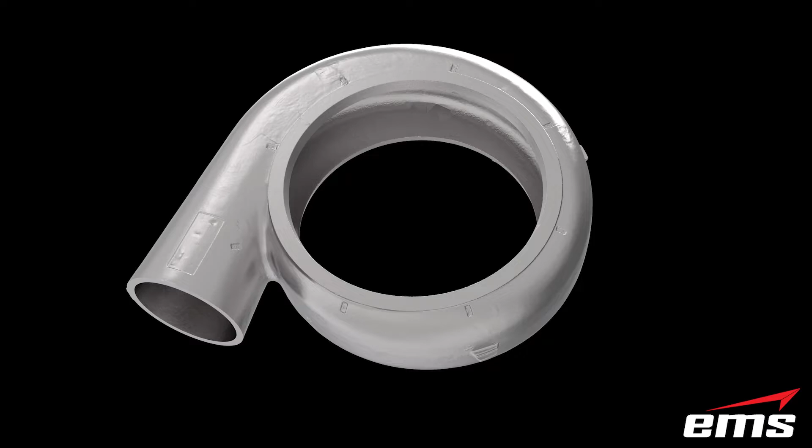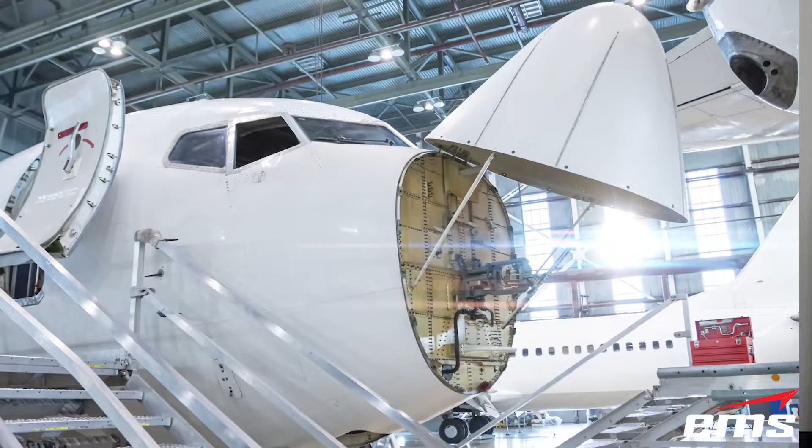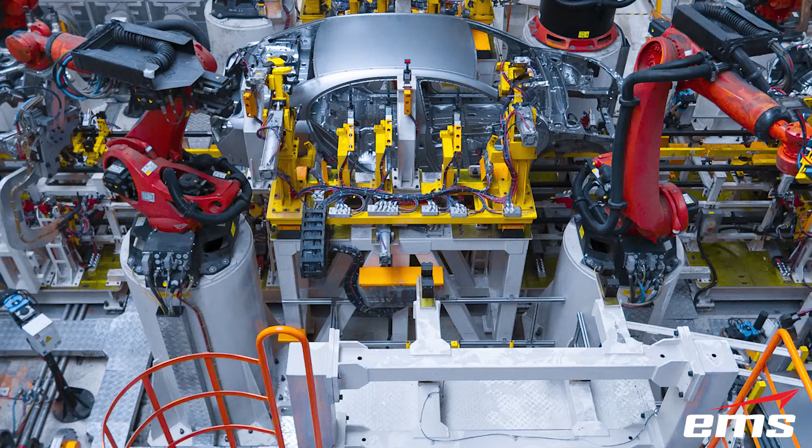Let's start by talking about who the new HandyScan Max is for. This is for people who want 3D scanning and metrology grade inspection for medium to large parts, and be able to do it on a shop floor quickly and easily with a system that is very portable. This includes large metal fabrication assemblies, large aerospace parts and assemblies, large tooling like vacuum forming molds and dies, and large layouts of equipment, machinery, plumbing, electrical—anything where you've got a big area that you need to scan, this is going to be a great scanner to take a look at.

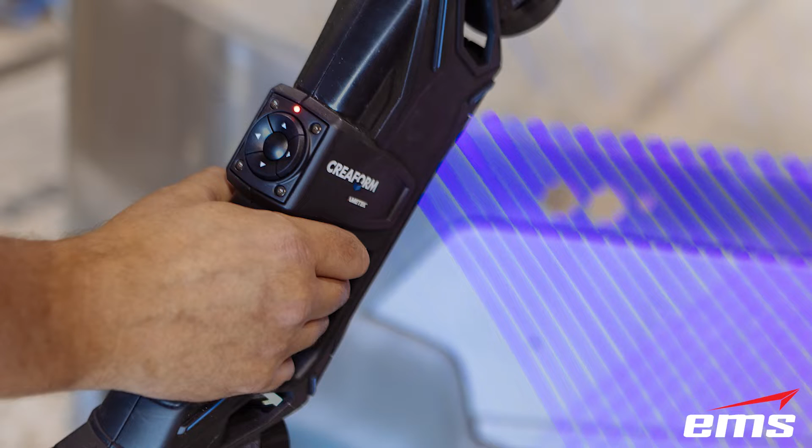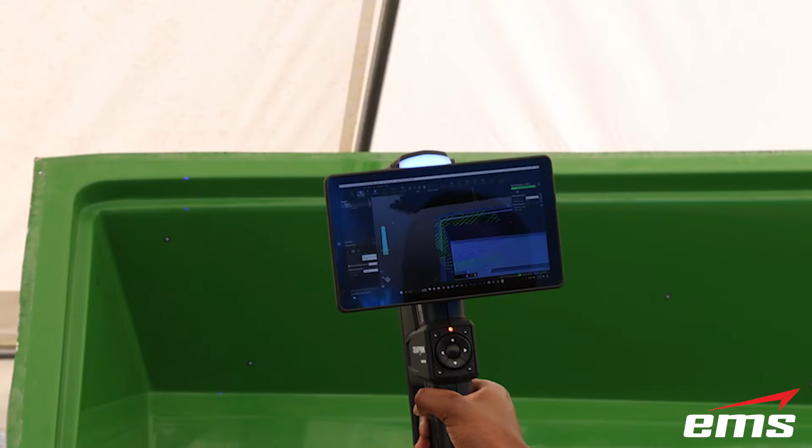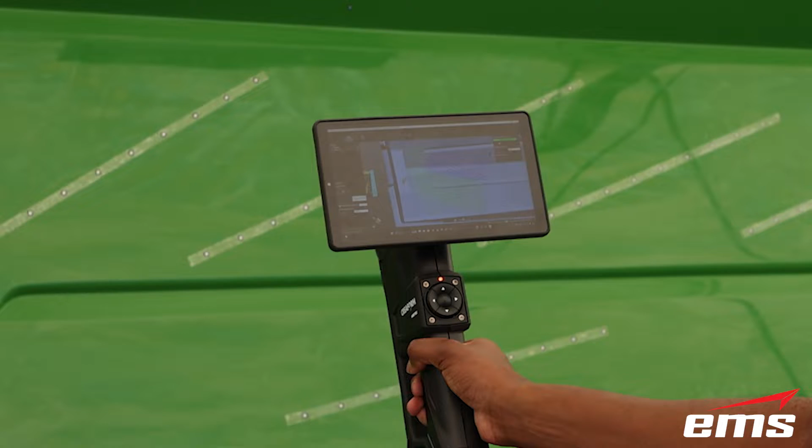You've got the smart panel on the back here, just like all the other Creaform scanners. You can control a lot of stuff. And then the other thing that's new on this scanner is we have a mount back here so that you can put a phone or a small tablet for remote viewing and control. What's nice about this is when you start scanning large parts, you have to be tethered to the computer, but this allows you to basically have that computer screen right here. You can control everything as if you're standing next to the computer—you can watch what you're scanning, stop, start, zoom in, all those kind of things right on the back of the scanner.

So that's really nice. And then finally, this has 3 different scanning volumes, and we're going to go into more detail on those and the differences between the standard model and the Elite model next.

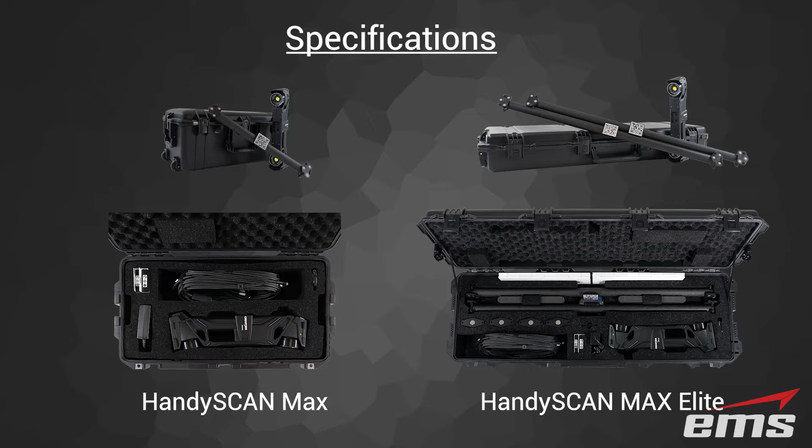Okay, first let's discuss the packaging of the two scanners. The HandyScan Max has a smaller single scale bar, so you can see it's in a slightly smaller case, where the HandyScan Max Elite has two longer scale bars, and you can see it's in a little bit larger of a case. But both of these cases we have checked as luggage and had no issues flying with these to go on site and do scanning projects.

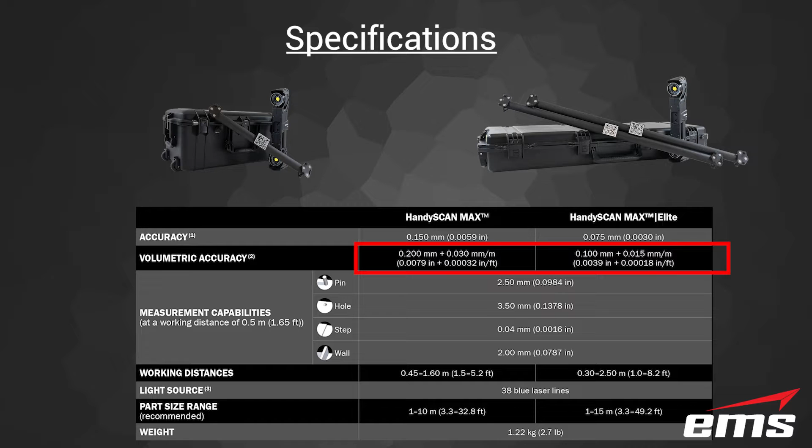So besides the accuracy difference, the other big difference between the two scanners is the scanning volumes, and we're going to go into much more detail on that now.

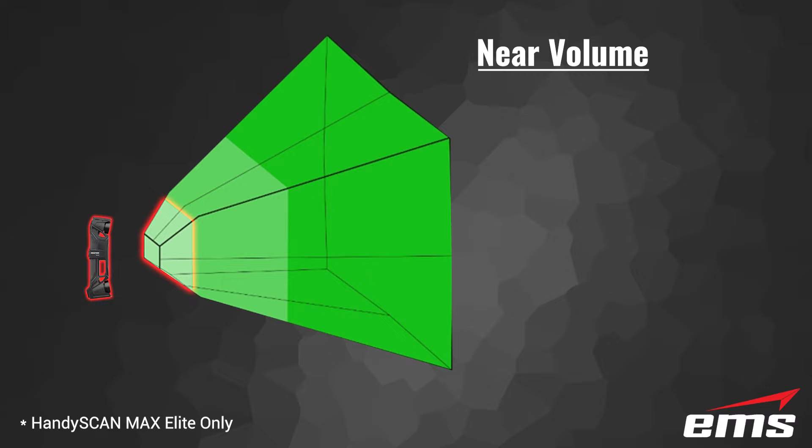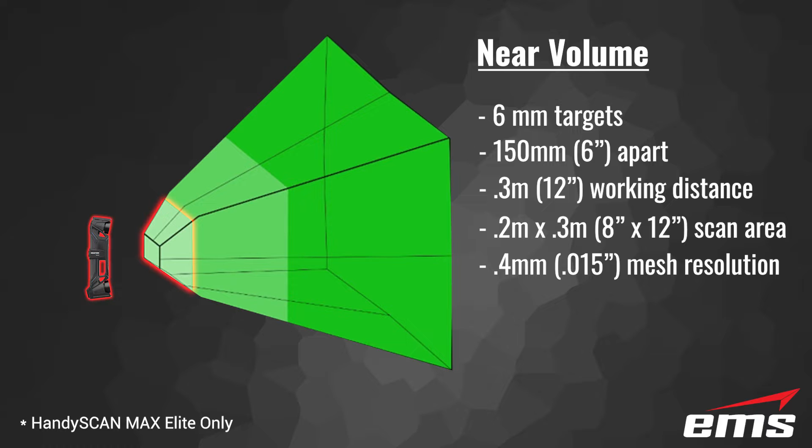Okay, so the first mode is what's called the near volume, and that is, as you see in the graphic here, that's your closest volume. That's the one if you're looking for the highest resolution. It uses the standard 6mm targets. You place them about 6 inches apart. It has about a 12-inch working distance or depth as you scan. And the scanning area, kind of your XY, is 8 inches by 12 inches. And you can go as tight as 0.4 millimeters or 15 thousandths of an inch, and that is your mesh resolution.

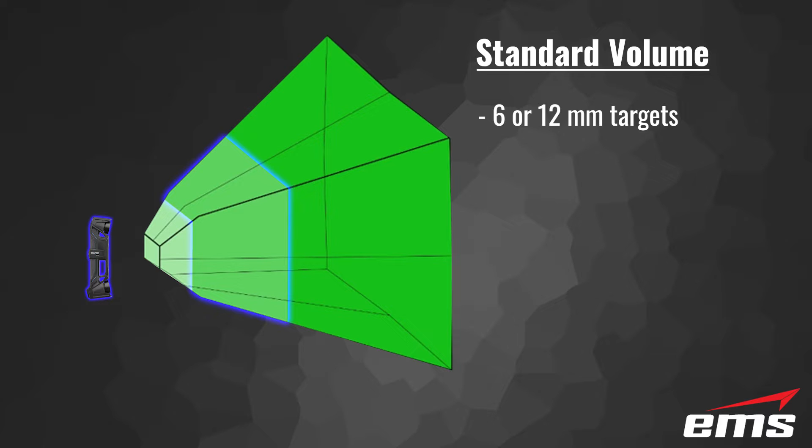So next up is the standard volume. This is available on both the standard Max and the Max Elite. Now, you can use either the 6mm targets or the 12mm targets. You can't use a mixture of both, but you can use one or the other. And the targets can be farther apart, at about every 12 inches. The working distance is 3.3 feet, and the scan area is about 3.3 by 3.3 feet. That's, again, your XY area. And the mesh resolution can go down to 0.8 millimeters, or 30 thousandths of an inch.

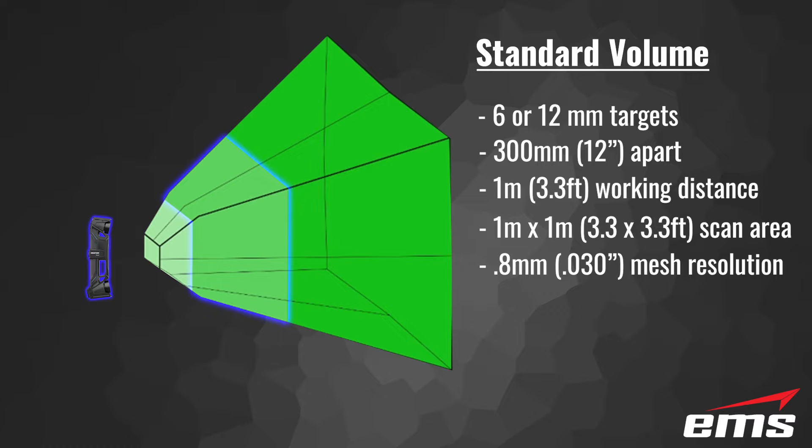And the final volume is the far volume. This is also only available on the HandyScan Max Elite. This uses only the 12mm targets. The spacing of those targets can be 20 inches apart. The working distance is 8.2 feet, and it scans an area of 6.6 by 7.9 feet. And the mesh resolution is 3 millimeters, or 0.12 inches.

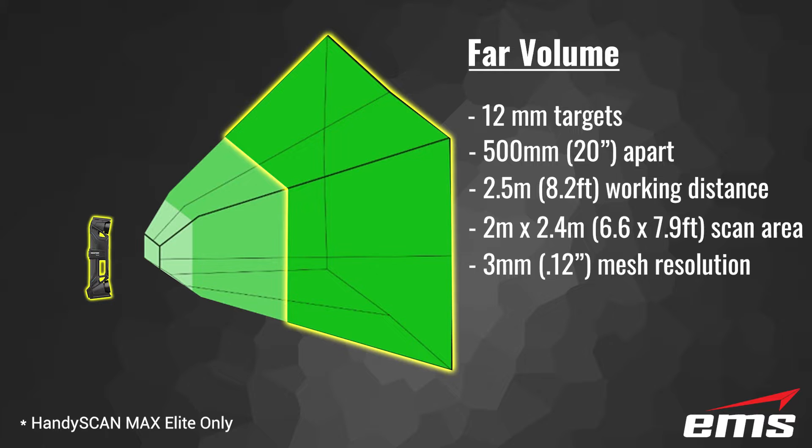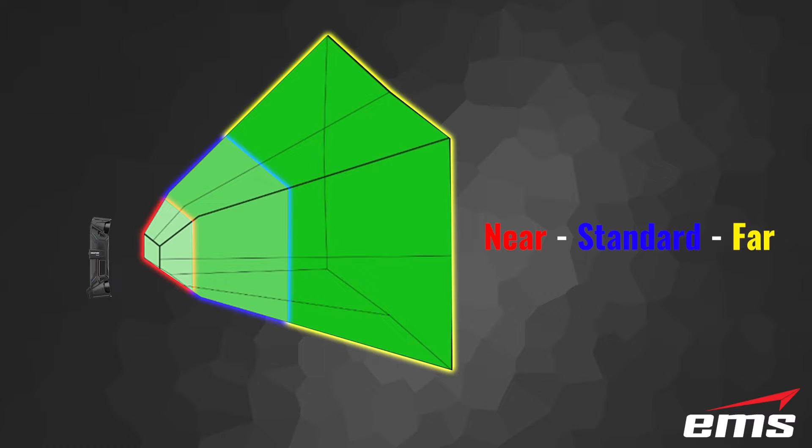So those are your three volumes available. All three are available on the HandyScan Max Elite, and the standard mode is available on the HandyScan Max. Now, part size will dictate a lot of this as far as which one you choose, but maybe which targets or which resolution you would like could also determine which mode that you pick.

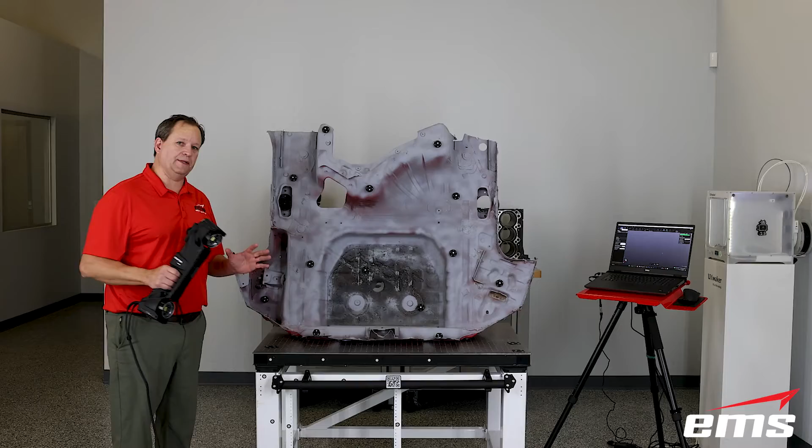Okay, so now we're ready to actually do some 3D scanning, and I thought we would start in the standard mode because I think that's the mode we found already that we use the most. But you may use only the very large mode or the short mode or all three. But let's start with the standard mode. So the standard mode uses the 6mm or the 12mm targets, as we talked about. And let me explain my setup here.

So I have these new spherical targets from Creaform. They come in a nice kit, and it's basically a little round sphere with 6mm targets, and then it's got a magnet on the bottom. Now, if your part isn't magnetic, we use that kind of thicker foam double sticky tape, and we just rip it or cut it to size, stick it on here, and then we can stick it on the part. This is a floor pan out of a car, so it's metal and obviously magnetic.

So you can see we don't have that many of the spherical targets on here, maybe 10 of them. Now, you can use just the standard sticky 6mm, 12mm targets in this mode. You can use a combination of the individual magnetic targets, those half spheres that we provide the CAD model for if you want to 3D print them—I'll put the link in the description below. You can use those, you can use our speed target tape, really any combination. Now you can't mix 6 and 12 millimeter targets, it's one or the other, okay? But you just randomly place them around like any Creaform scanner.

Now what's new are these little targets here, these little flat targets. And this is to create clipping planes automatically. Because what you'll find on large parts like this is typically you're scanning it out on the ground somewhere or whatever. You can now—I've placed 3 of these on here, and depending on how many you place, it'll automatically do different things, but 3 of them will create a plane.

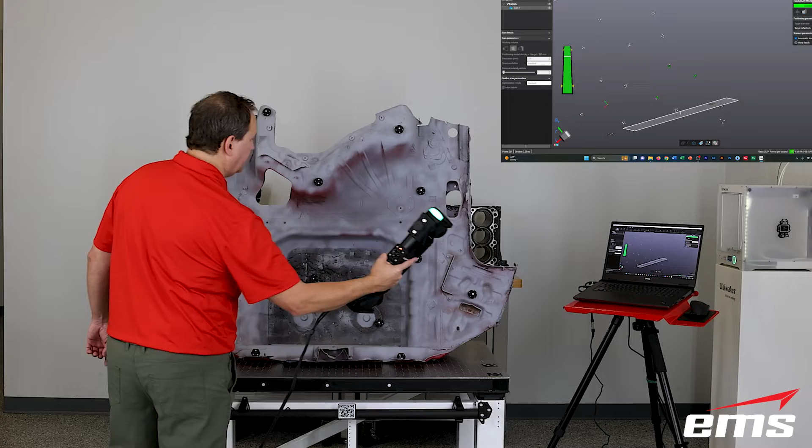So let's start, and you can see it's already found that clipping plane. And then I'm moving around, and with these spherical targets, you just want to try to get as many of the targets as you can.

Now let's come down, you see it's got the scale bar, and the scale bar's turned green. If it's red, that means you don't have enough measurements on it yet. You just want to try to get everything from a bunch of different angles, especially with these spherical ones, because you've got a lot of targets on the side.

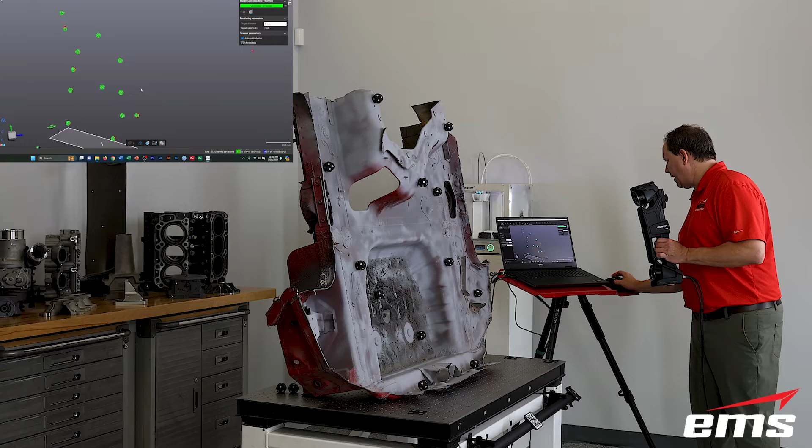Now, once we get done, what you're going to notice is a lot of the targets are green, and a few of them are red. You see here, a couple are red. That just means it doesn't have enough measurements on that target yet to consider it a good quality target from a positioning standpoint. So it's totally up to you.

You can go back and continue to scan and try to pick it up. 9 times out of 10, as you continue scanning, it'll get more measurements on it and make it a better target, so to speak. So once we have that done, now we tell it to scan surface just like we would any other scanner.

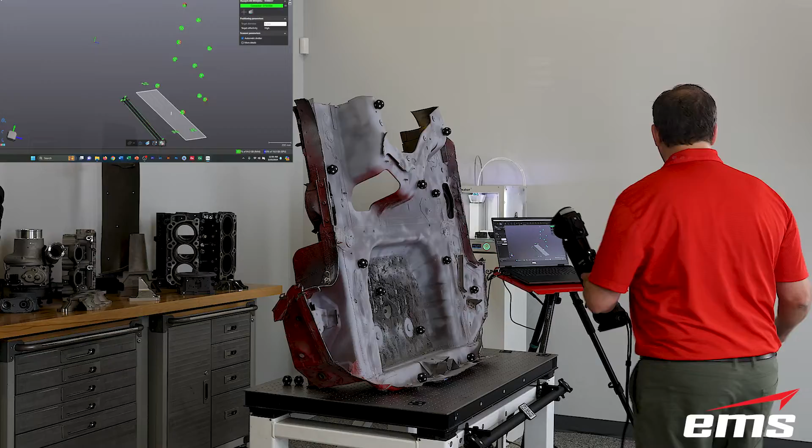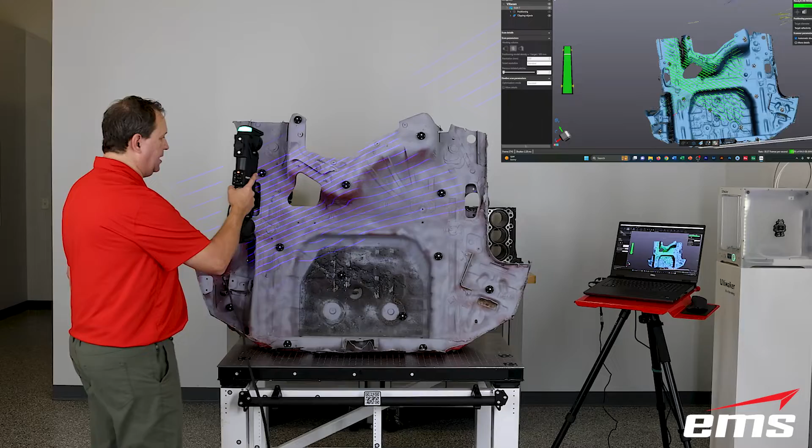Okay, so let's go ahead and do our scanning, and you'll notice right away just how big of an area you can 3D scan. So those 38 laser lines, and yellow turning to teal is just like all the other scanners. That's letting you know you've got enough scan data based on the resolution. So you want that to be teal for fidelity.

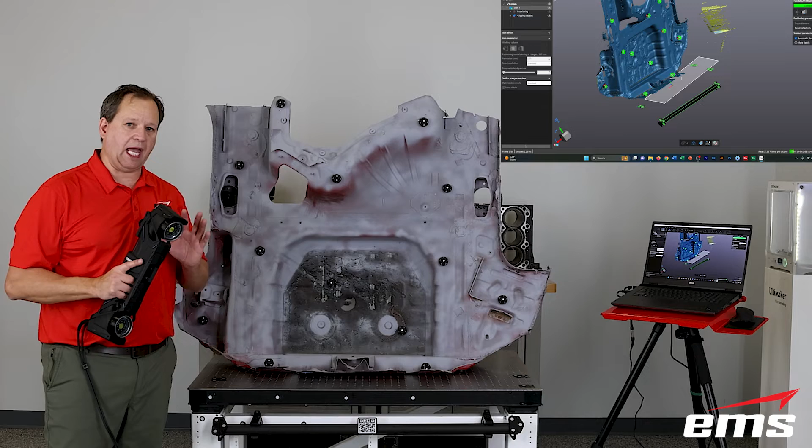Now, as far as the resolution goes, we're set right now at 2 millimeters. We can crank that down to the max, but what you'll find is this thing scans so much data so fast, you've got to be a little bit careful. As long as you've got a computer that can handle it, you can get a ton of data very quickly.

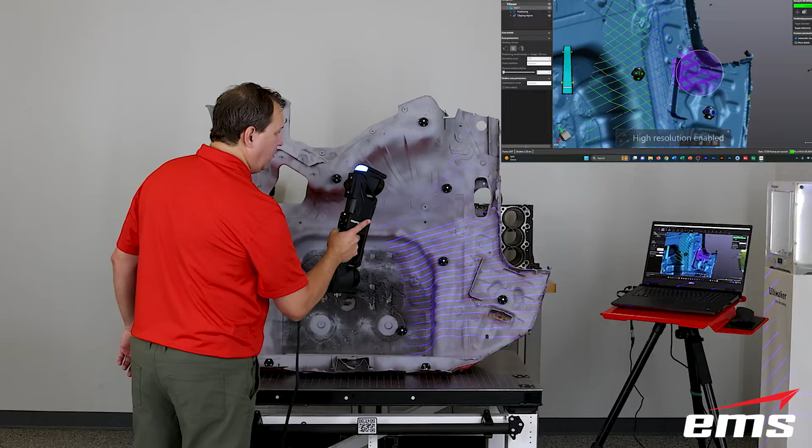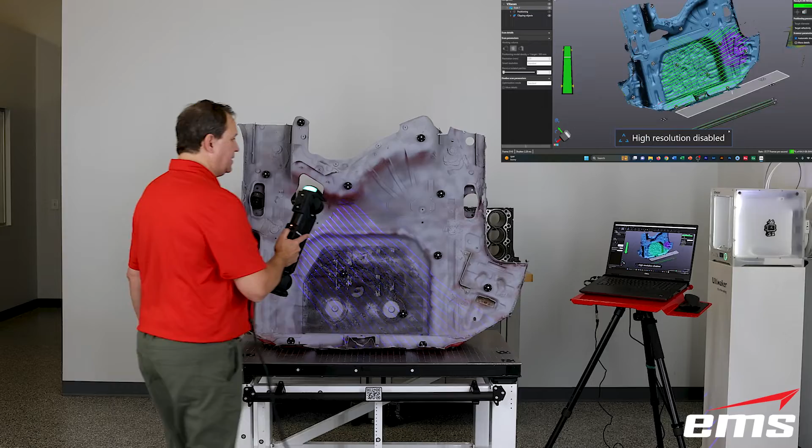So what we found is we're using the high resolution mode, which is on some of the other Creaform scanners, but we're using it a lot more on this scanner. So we set the resolution a little bit higher, and then let's say over here in this area, I want to get tighter resolution. We click that high resolution mode, and you can see everything in purple. We're just painting that with the scanner here, and we're set at 2x, so we're going to get twice the resolution, meaning 1 millimeter resolution in this area, and then at any time I can click it off and continue scanning. So we'll have the higher resolution.

Now don't confuse resolution with accuracy. The accuracy is the accuracy. This is going to scan at 75 microns, or 0.003 of an inch, all the time. And keep in mind, that accuracy is in an area like this. You start doing something much larger, you've got to look at your stacking error, and that's some of those numbers we were showing earlier.

But generally with something in this size, we should be well within that tolerance. That's also part of the reason you want that scale bar there.

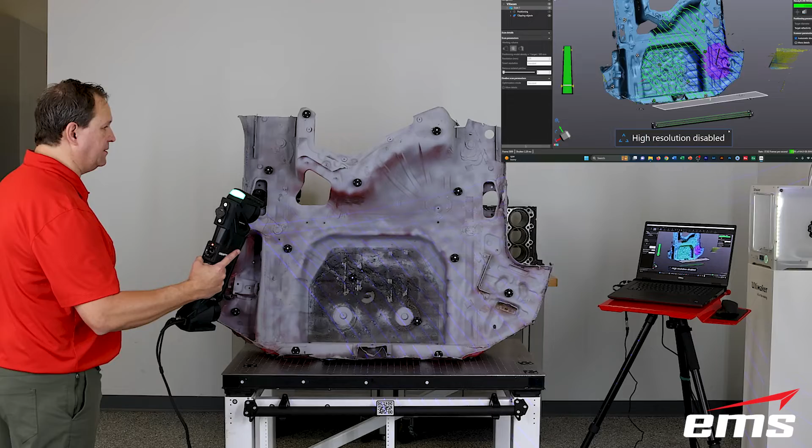But also, just like other scanners, you can see here how close it starts to turn red or eventually will shut off. Watch how far back I can stand, right about here. I'm about 3.5, 4 feet from that part, and look at how much data. Now I'm going over the same areas again. Of course, that doesn't hurt, but you can see just how fast and how much data we can scan.

So that's the standard mode and kind of the setup. Next, we'll go ahead and do a small part in the near mode, and then finally we'll do the far mode, just to show you those different modes. But this is generally how the setup works and how you would scan with the new HandyScan Max.

All right, so now we are set up to work in the near mode, okay? So parts like you see here, we've scanned this with many of the different Creaform 3D scanners, this transmission housing. And you can see it's just standard Creaform targets on it.

I've got one of the new targets to define the clipping plane. So just like before, we will pre-scan the targets first. I've come over here and I just say scan targets, and we'll go ahead and scan those. You can see it's already found the clipping plane, and we just work our way around just like any other Creaform scanner.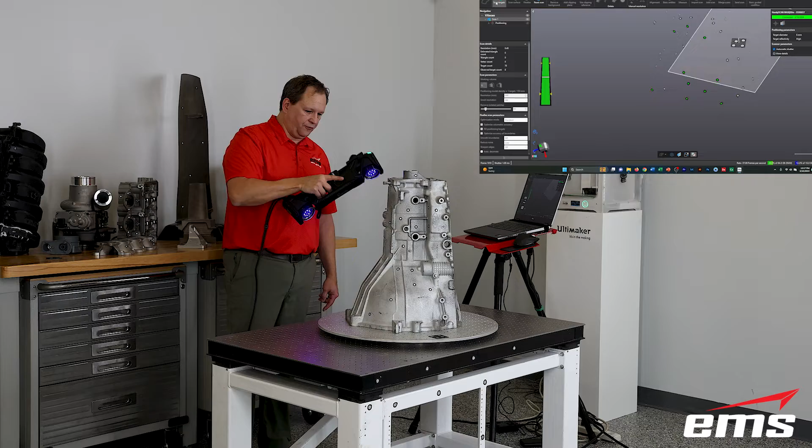Okay, and if we think we've got it good, we can stop, and you can see there's a few red ones. We don't have to, but if we want to, we can go back and just keep moving around, because it's using triangulation to look at those targets and get good positioning on them. So it's up to you if you want to do that. It'll naturally do it as you're scanning, but you can see there. Now let's go ahead and stop this and scan the surface.

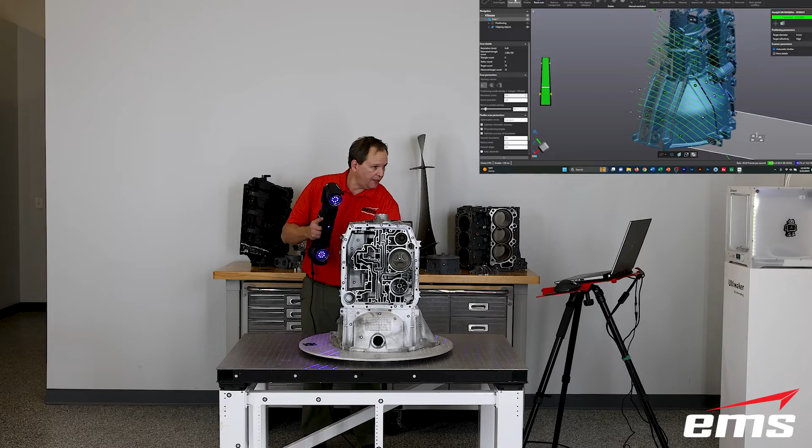Let's come over here and just watch how fast this will scan. And I've got it set to the max resolution of 0.4 millimeters.

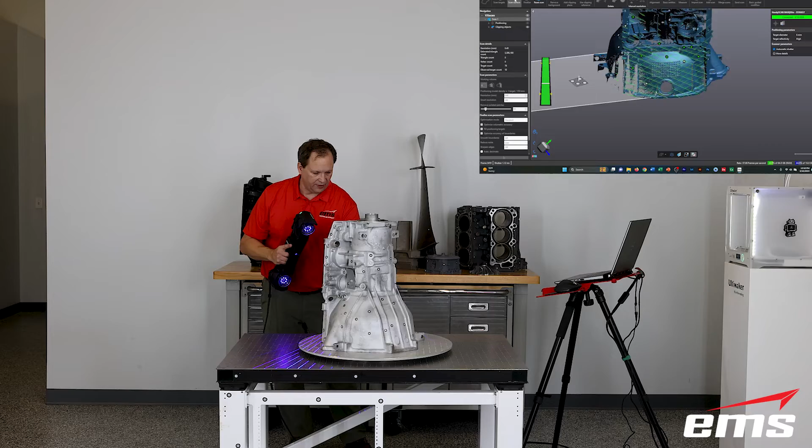Now, even when we're scanning with the HandyScan Black or the other HandyScans, we don't go much lower than 0.5 resolution, unless it's a really small part with really fine detail. So if you have parts like this, this scanner is going to work just fine for most things. And again, as I mentioned earlier, that's resolution, not accuracy. We're always scanning at the highest accuracy, but you can see how fast these 38 laser lines work.

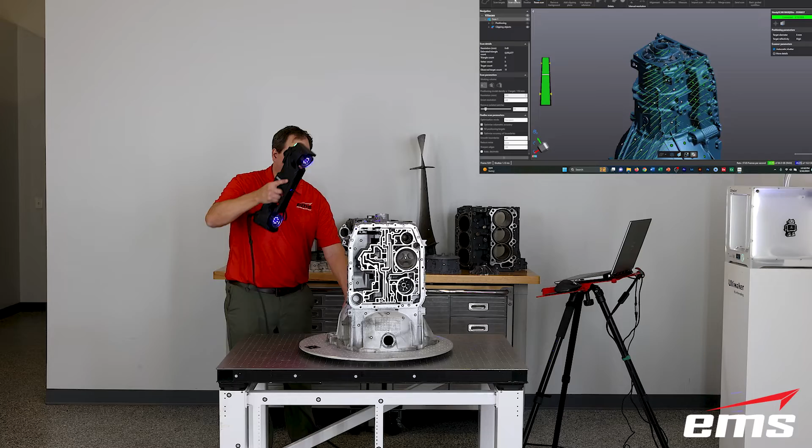Now, this does not have the single line mode like the traditional HandyScans do. That's one thing you'll have to consider. The single line mode will get in a little deeper in some of the smaller holes and smaller veins on this transmission housing. But the beauty is that you have a scanner that can do parts like this very well at a very good accuracy, and then you can go out and scan something 50 feet in size. It's just unheard of to have a scanner with this much versatility, okay?

So we keep going around like we talked about. It's already found our clipping plane. It's all line of sight.

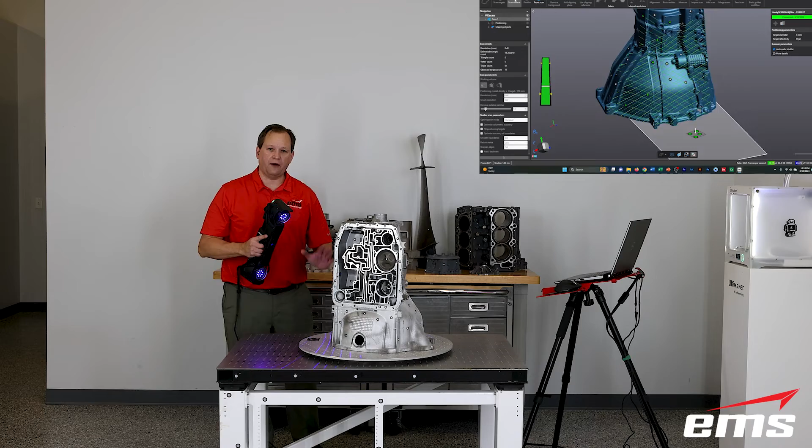Now, the other thing is this has a feature called auto shutter, which is new for a HandyScan. It's been on the GoScan Spark and the GoScan series for a while. But what it does is it automatically adjusts the shutter, which is the laser power, and the speed of the sensors, the cameras, okay? So when you have something dark and shiny, it needs more power. It needs to slow down that capture rate. This will do this automatically.

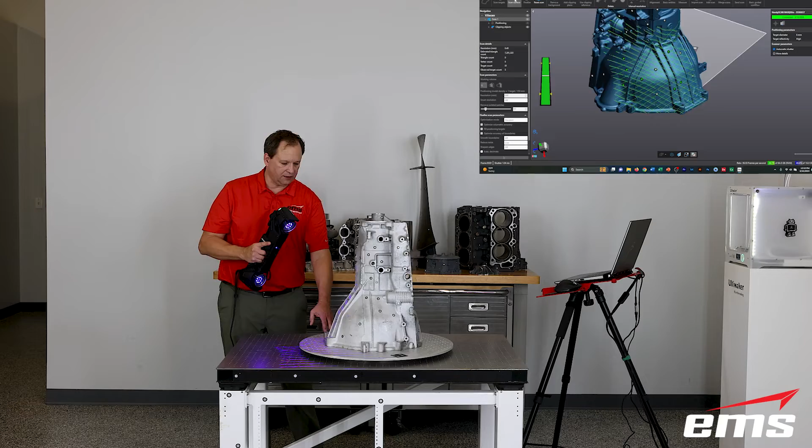So if you've got something dark in one area and light in another area, it'll automatically adjust the lasers and the sensor acquisition speed. It's really nice, and we've been using it for a while and found on most things it does it great. So you don't have to auto-adjust it anymore by telling it to adjust, then sample, or try to set up the HDR mode where you've got two different modes. This is basically going to do it for you.

So we found it really nice, and we've done some very shiny and very dark things with no problems. You can see I'm just going over and over the same part here. But let's stop this scan and finalize, same as before, where you stop scan and then do your finalize.

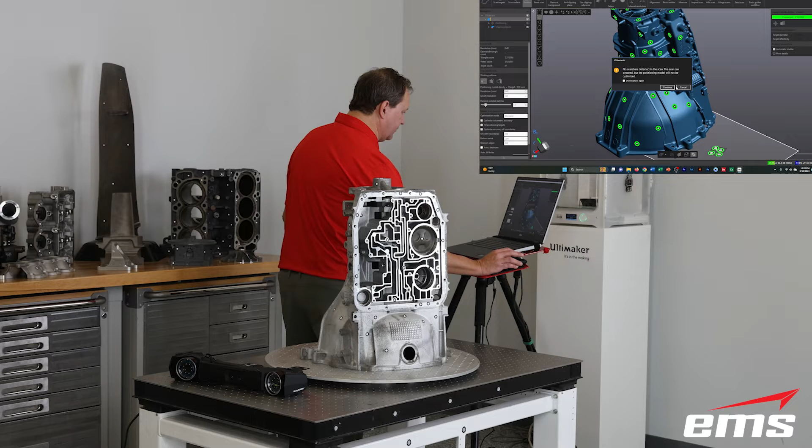Let's do that and take a look at how this looks. So look at the quality of this data in just that quick scan we did. It's absolutely incredible, the level of resolution and detail you can get. The versatility of this is unbelievable, being able to do smaller parts at good resolution and accuracy, to medium-sized parts, to things very, very large. So that's the near volume scanning.

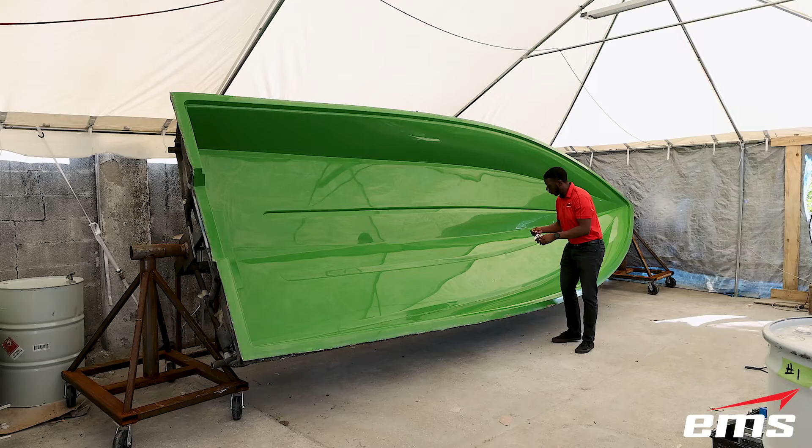Final thing we'll do is the far mode volume so you can see what that looks like. For the FAR mode, we decided to go out to a customer site where we could do a large part. This is a 22-foot mold for a boat hull.

You can see we're putting the 12 millimeter targets on, spacing them out quite far apart, about every 20 inches or so, just randomly placing them like you would any other target and moving around. But you can see how few targets you really need on such a large object when using FAR mode. Here's just a pan across so you can see the targets, a few pucks down on the ground, and our scale bars horizontally and vertically.

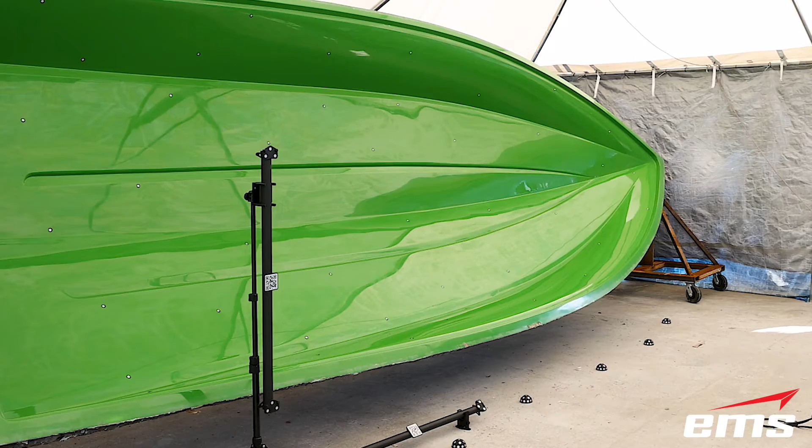All right, so now we're ready to do the 3D scanning, just taking the default resolution of 3 millimeters, and right away you can see how much data we can capture, how large an area in the FAR mode. We're just moving left to right and up and down, getting a little bit of overlap on our scans.

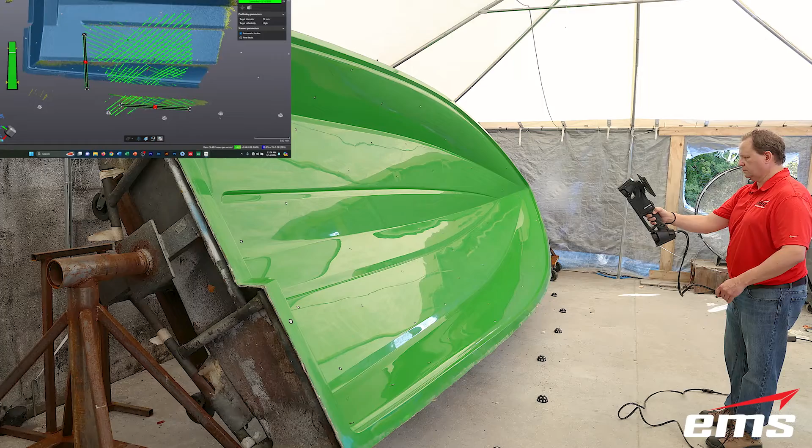Now you'll notice the scale bars there in the display. We've removed them so they're not in our way, but they'll still show up in the display, just indicating where they were. Once they've been scanned, you can remove them. So we're going back and forth. The data goes from that yellow color to teal in this mode, just like all the others, letting you know, based on the resolution you're scanning, that you have enough scan data for that area.

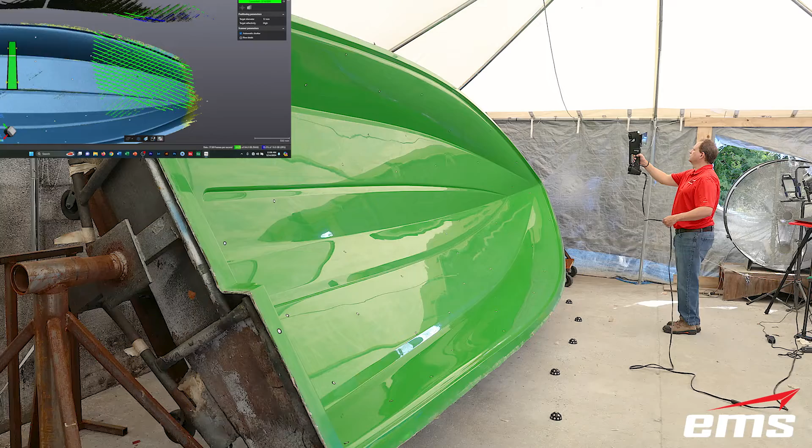Just working our way up here in the nose. We're using the tablet here because we're doing a large part, and it makes it very simple to see what we're doing without having to look at the computer screen. Then we're going to go back down and get some of these tighter corners a little better. Missed a little area down there at the bottom, and then we'll be done. You can see just how fast you're able to scan something this large, with only a handful of targets on this to do the 3D scanning in FAR mode.

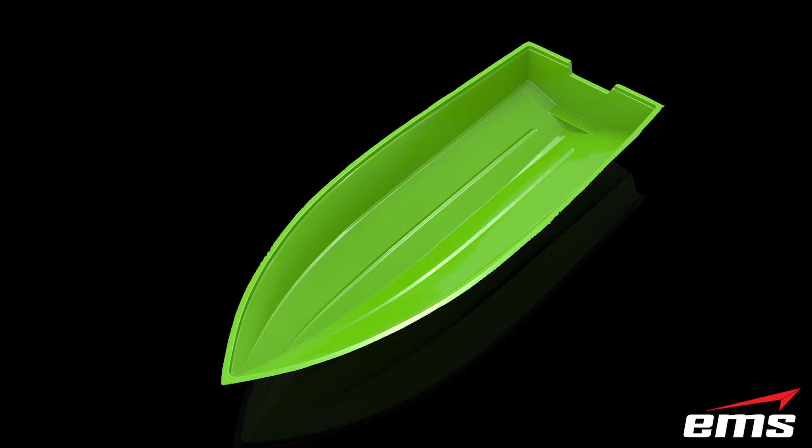And here is just a quick render of the actual scan data. This is right from the scanner, it hasn't been manipulated or smoothed or anything done to it. So you can just see how good a quality scan data we can get with the new HandyScan Max.

All right, so this wraps up the video on the new HandyScan Max. Hopefully you found this video informative and helpful as you're looking maybe for a 3D scanner for medium to large parts. Now, as I mentioned earlier, if you'd like us to come on site and do a demo or a benchmark, or you've got questions about this, or maybe you want to set up a virtual demo to get started, you can reach out to us.